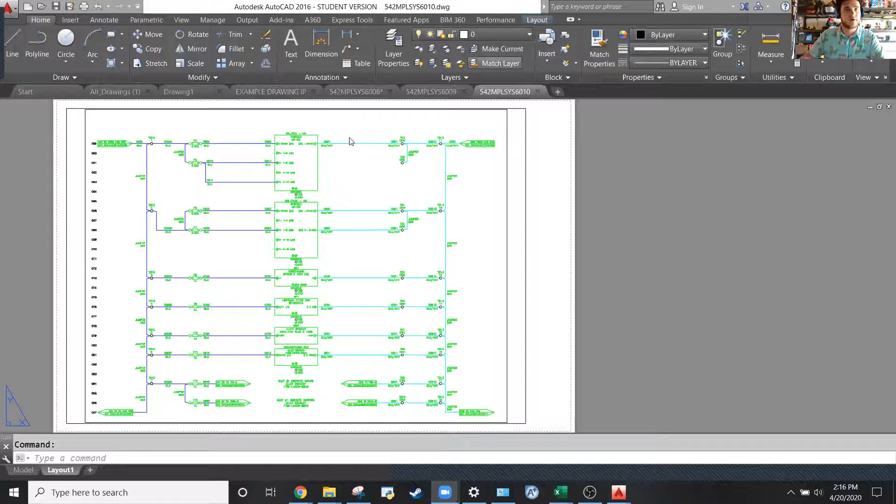So if you weren't here last time, hopefully you watched the video. Hopefully you have something along these lines where we have these 2 drawing borders. We got rid of the content that was in there already. There's a numbered index on the side. We have a little bit of content started here, and we're gonna make a 2 drawing set.

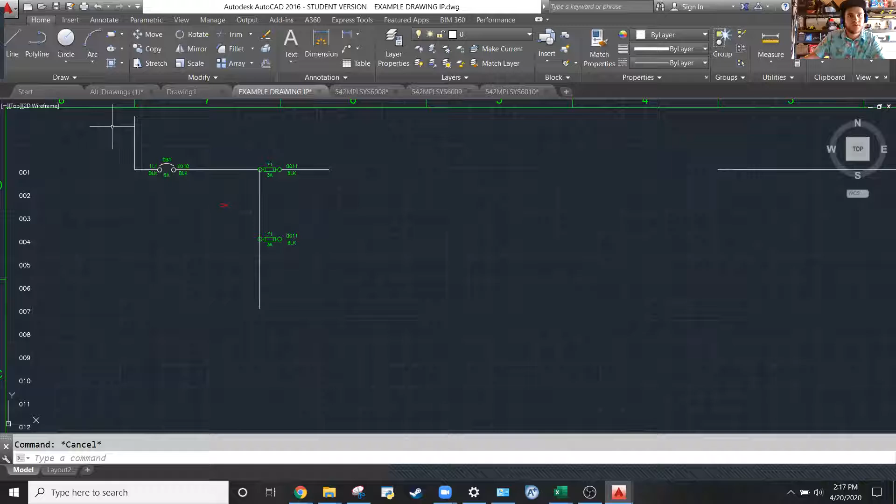Just as an example of multi-drawing sets. So real quick, does everybody have this line in, circuit breaker, and 2 fuses with a reference line and this little doohickey here? No? Can we go over that a little bit? Yeah, for sure. So all I've really done here is taken content from these example drawings here. So that was drawing 8, 9, and 10 out of the example set that I sent you guys.

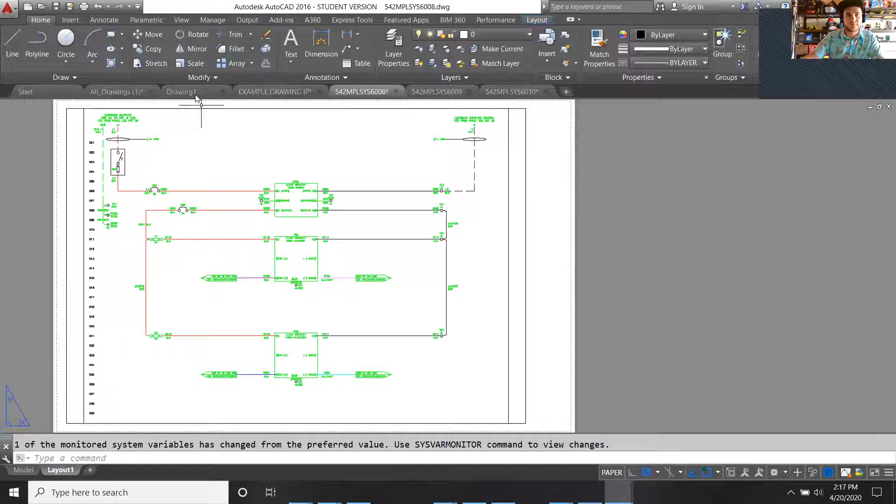So does everybody have that drawing set open and available? Because we're going to be grabbing more content out of there as we go through. Yes. As usual, yeah, thank you, Sal. I'm going to take the resounding, deafening silence as confirmation that you do indeed have the example drawings open.

So what we did last time, let's go ahead and rehash that, get our AutoCAD muscles working. So we're going to go to drawing 8, and in the model space, we're going to grab this content. Oh, I just realized I kind of made a mistake last time. So grab all the content off drawing 8 and just do a Control-C and then a Control-V, okay? And then do a quick scale to resize this content to this border.

Because last time I copied content from this drawing into our working drawing without rescaling it, which means all the text and everything is too small. So you're going to grab this, move. I'm going to go through this really fast because this is stuff we've done before. So I'm going to type move, grab the corner of this, snap it to the corner of that, select all of this content and type scale. Specify my base point for scale, type R for reference, grab this corner and this corner, and then snap it to this corner right here to set my reference scale. Cool, now that's all rescaled.

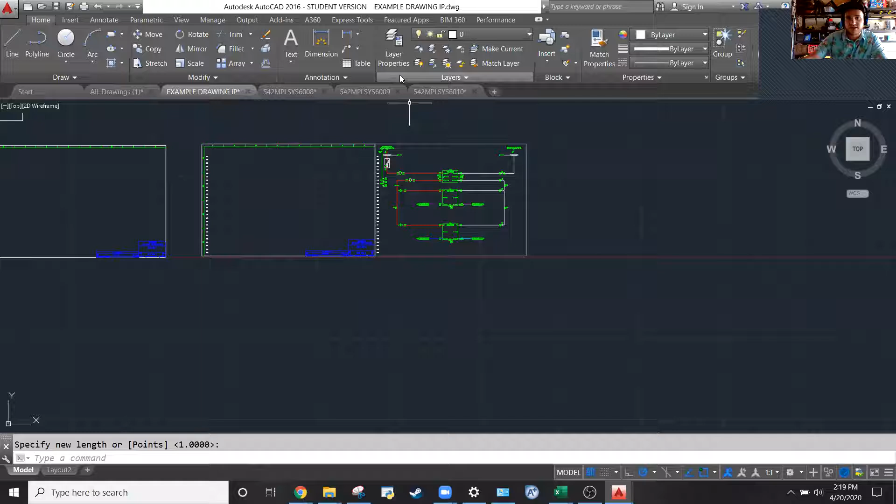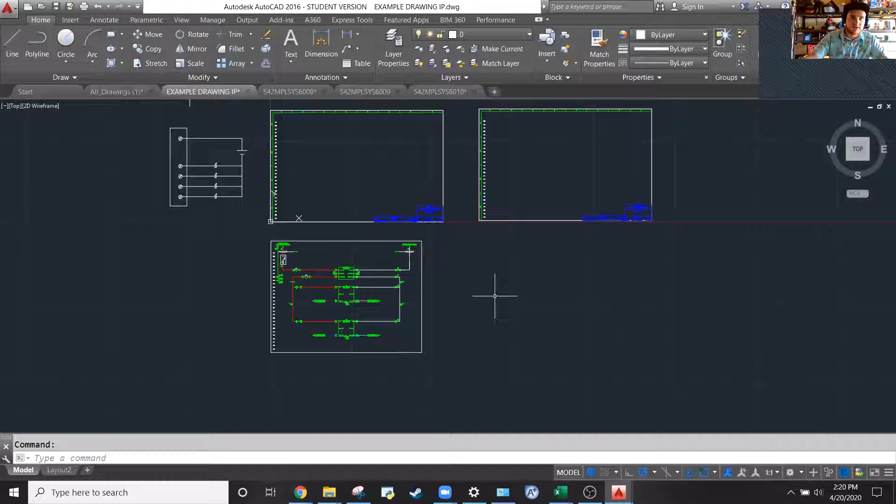Now, if you're wondering why we're just cannibalizing content out of an existing drawing rather than drawing all this from scratch, well, the answer is you're not going to draw stuff from scratch very often. There's no point in reinventing the wheel when 90% of the time the CAD content you're going to be creating, you're going to be following some conventions, and there's going to be existing content from a similar project that you can reference and use to your little heart's desire.

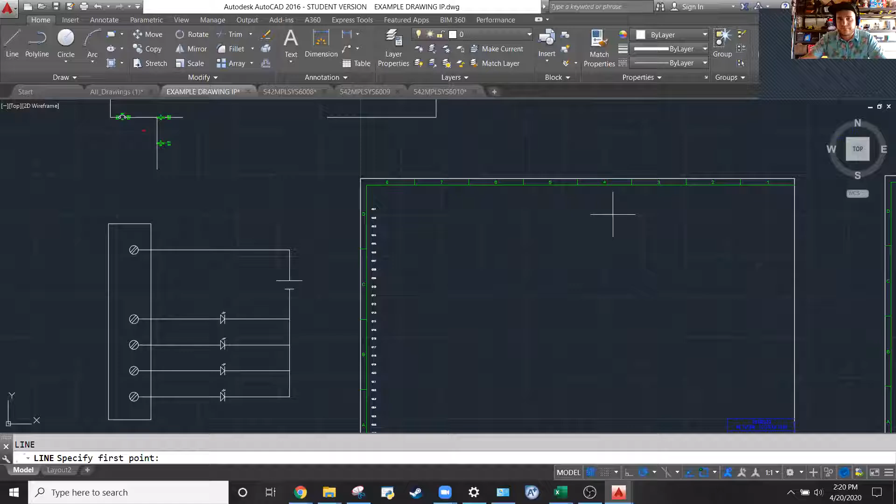Okay, so I want something that looks like this for my power distribution. I'm going to do one important thing first. I'm going to draw a reference line in my border before I insert content into my border. So I'm going to find the midpoint on my line, which is right here, and just draw a reference line there. And then I'm going to change the layer for that to the stuff layer. That's a John Davis naming convention. I tend to name stuff stuff.

And then I'm going to open the layer properties panel up here. And I'm going to change the stuff layer to be colored yellow. And I'm going to rename the stuff layer to reference. Okay. And that's going to be my reference layer that I've talked about before, that at the end of this I'm just going to hide because I don't want it anymore.

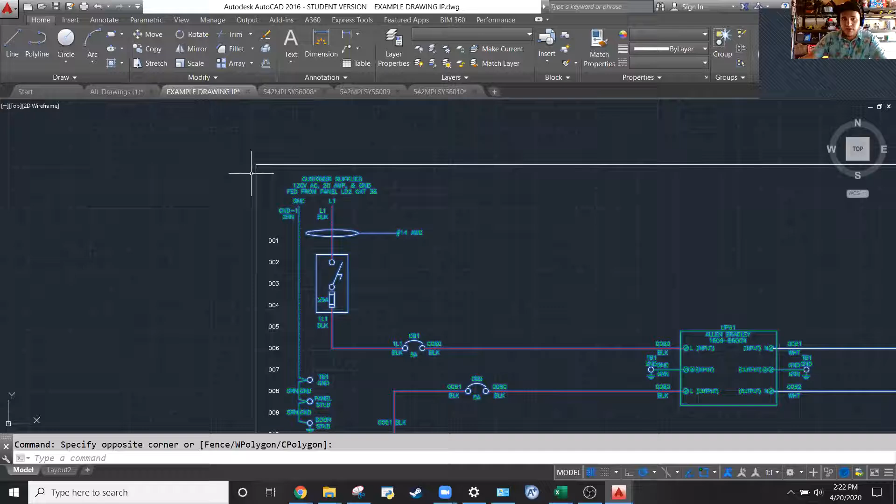So now we're going to draw a power distribution drawing. I know in my power distribution drawing for a panel, I'm going to want an incoming ground, an incoming live line, and an incoming neutral line. And so I'm just going to grab all this existing content here. Make sure you grab all that text. Okay. And I'm going to type copy. And then for my copy reference point, I'm just going to grab in the middle of this power supply right here.

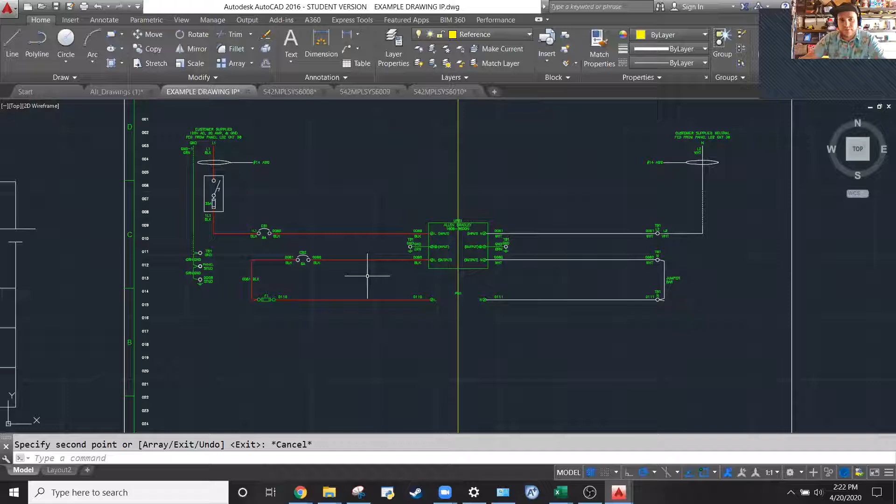Grab that line. And then I'm going to scroll up into my new drawing border and drop it in there. Okay. Now, this is scooted down too far. I don't like this, but we're going to fix that in a minute. One of the other things I don't like is this content that I'm stealing was for a heavy duty industrial panel that had a lot of juice coming into it. And so it had this big mechanical disconnect. In our panel, like we talked about last week, I don't have a big mechanical disconnect. I just have a circuit breaker.

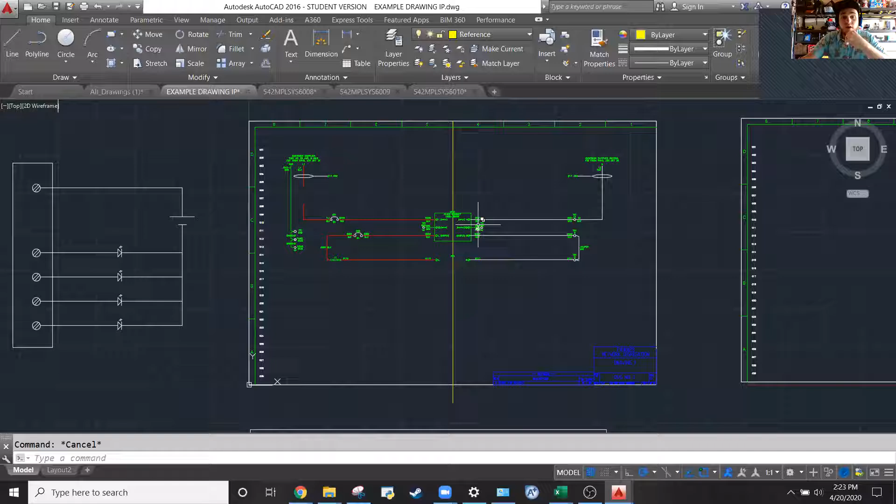So I'm going to select that breaker, and I'm going to delete it because I don't need it. Okay. Could you zoom out really quick so I can see how much of that drawing you pulled? Yeah. So what I wanted to pull is the ground circuit, and then definitely everything feeding into the first box. So it's this first UPS box here. Okay, but not this. So we'll probably go back and grab this content down here later. Okay. And so actually what we can do is just go in, well, just leave it for now.

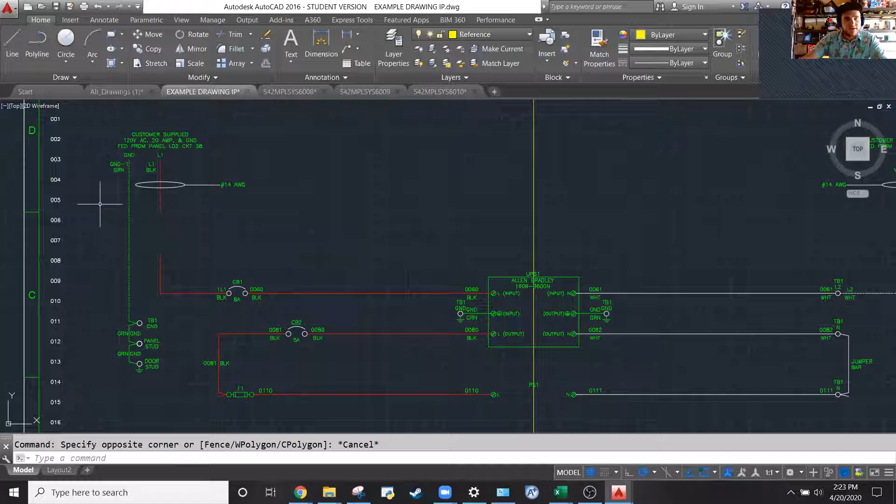So the next thing I want to highlight is that this line here is dashed and this line here is solid. Can anybody tell me why that might be? Take a wild guess. There's no wrong answers here. Nobody? We have no volunteers as tribute.

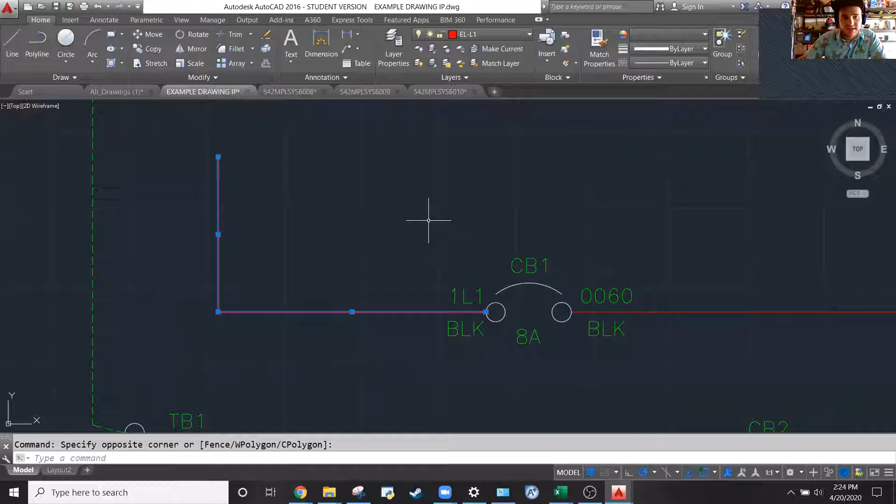Okay, so the reason this line is dashed and this line is solid is because these dashed lines are coming in externally from an external panel. Doesn't necessarily need to be power. And these lines here that were coming off that mechanical disconnect are installed in the panel. So they're present. And so basically what this is delineating on our drawing set is what wires get shipped in the panel to the installation site and what wires need to be brought into that panel once it's installed at the installation site.

Sorry. Got to shut off my air compressor this morning. Okay. So we got a chat. Yes. That sounded like a gnarly guitar riff. I thought you were gonna start shredding it, dude. Start shredding it in our Pantera style. No.

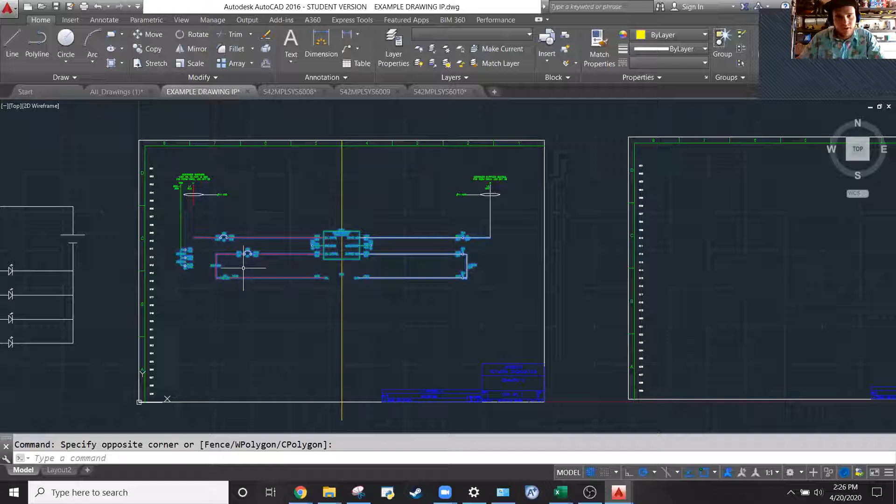Okay, so I want to delete this upright line because, like I said, I'm getting rid of that main disconnect. Actually, wait a minute. I'm going to do this right and smartly. So because I got rid of that main disconnect, I have all this unused space here in this drawing. I got a big chunk of space that I'm not using that I want to take up because there's no reason to use up all that space unless I need it. So I want to go in here and select all this content because this is all the content that we're going to shift up. And then I actually want to select, let me think about how to do this. Okay. I'm going to draw another reference line from the top of this line, come across through here, and just drop it anywhere past that line. And you'll see why I did that in just a second.

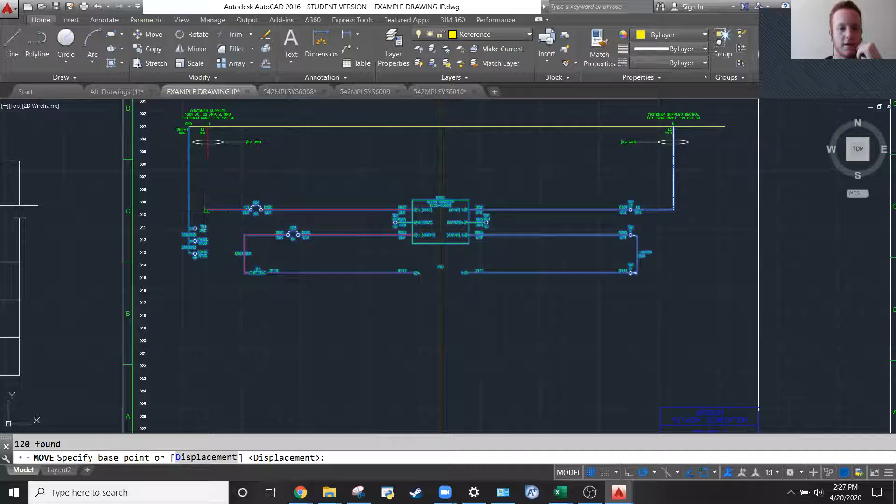Okay. So I want to grab all the content here, all these lines I brought in, as well as these two upright lines. And I'm going to type move. And then I'm going to click this reference point and bring this line up here. And now you can see, hopefully, why I drew this reference line. So now I'm going to select this line and type trim, and I'm going to get rid of all that extra length there. And so I just scooted up all that content without having to do a whole lot of adjustment.

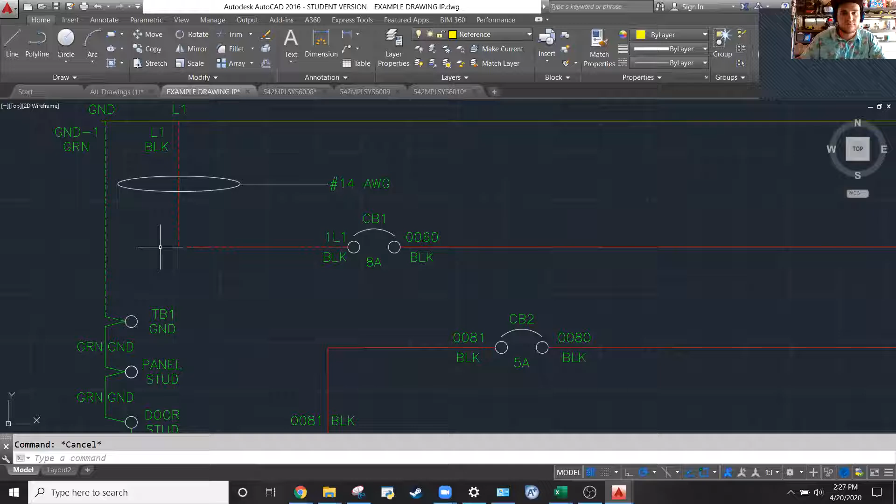And the last thing I need to do is change this line here to that dashed or hidden and extend that line over there. Over here. Oh, that's good. So I think when I had to readjust this red line to bring it out over here, that was actually a misalignment for the original drawing content. So just always be on the lookout for that. Okay. Now this looks pretty good, but it's still scooted down too far.

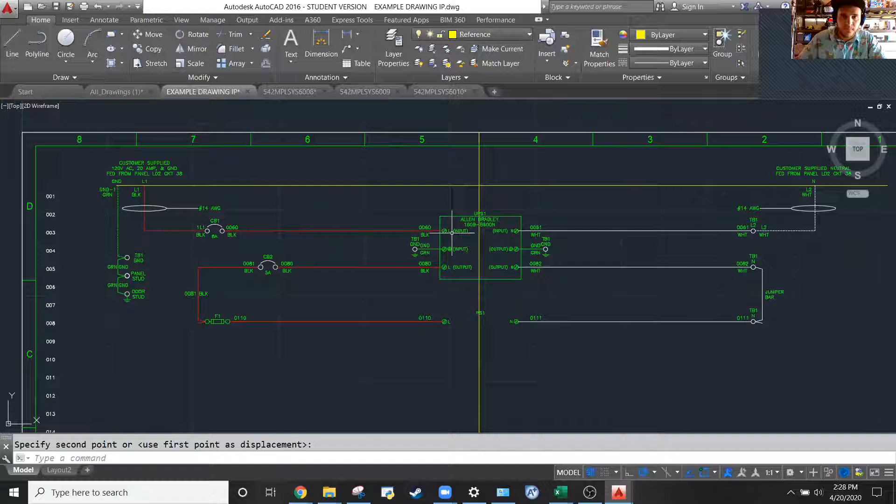If you look at the source drawing, this lettering is up against the top of the border. And so I just want to grab all that content, do another move, and just bring it up by hand to right about there. And so I picked where to align this, just eyeballing it, so that it lines up with one of these numbered indexes over here. And if you want to check that, you can extend it out.

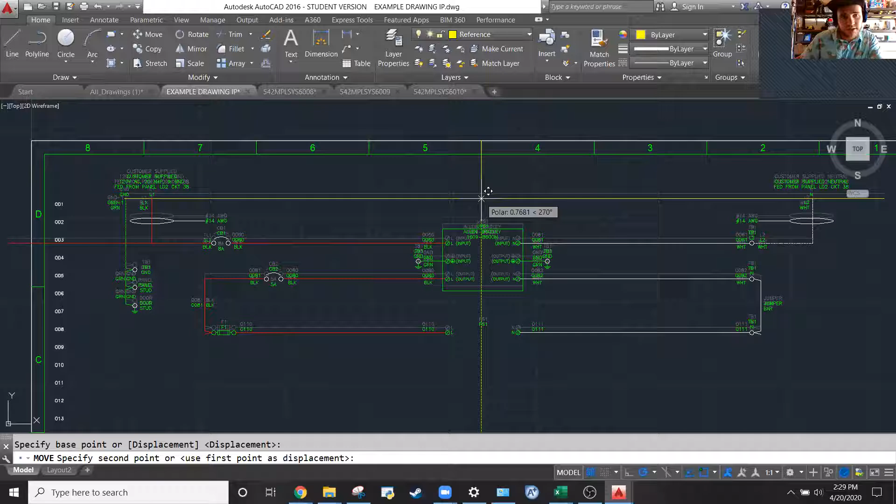Okay. So actually what I should have done, and I'm going to do it right now, is make sure that really aligns properly with one of those numbered index points. So I'm just going to scooch it down just a little bit until you can see that line is just below the 003. Okay, and I'm going to snap it. Okay, so now that's aligned. I'm going to unextend that line back to where it's supposed to be.

Alrighty. And then now I need to look at all my wire numbering. So I have L1 in, and then that's magically turning into 1L1. Well, that's a problem because that doesn't make any sense. You need your wires to be labeled the same on both ends. Okay, the reason that is because on the original drawing, you had L1 coming in, and then it went to a breaker, and then on the other side of that breaker, it was 1L1. So I need to change that to just be L1 so that we're self-consistent with our wire labeling.

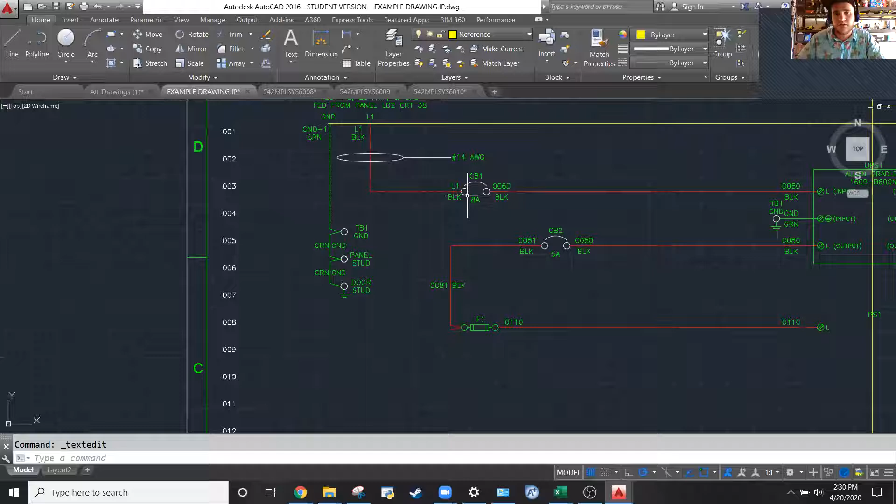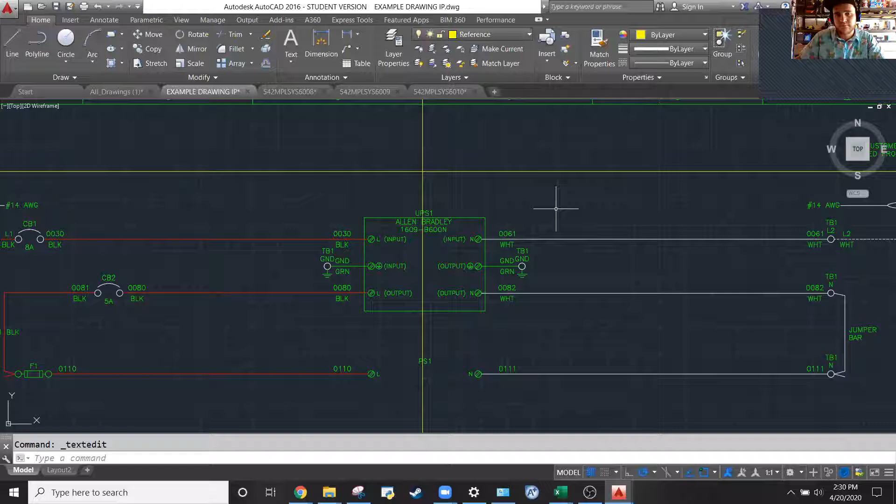Okay. And then this wire right here on the old drawing, because that content was further down, is now going to be on line 3. So I need to change this from being 0060. I'm going to change it to 0030. Okay. Do that consistently throughout. And then do the same thing on this wire. Okay, and this L2 looks good. This thickness call out looks good, so I'm gonna leave that.

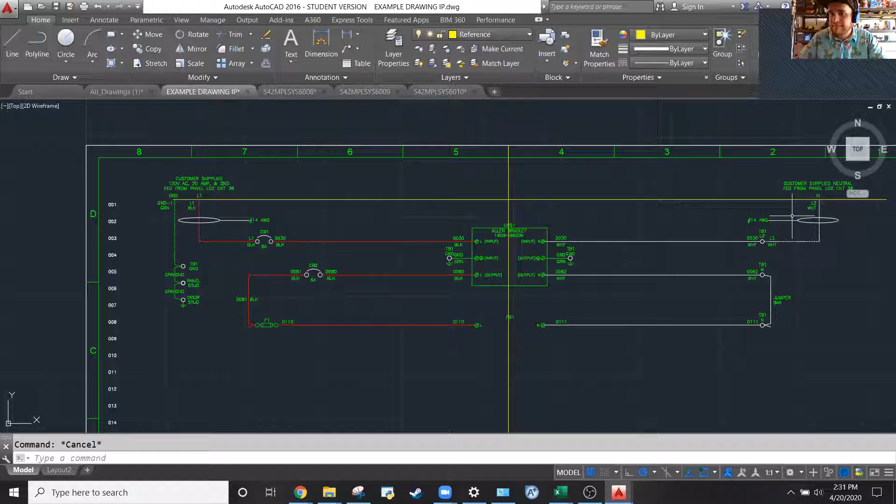Okay, now, the one other thing is these call outs of where the power is supplied. I need to change that. So double click on that. Oops. Because I don't know where that power is gonna be coming from, I'm just gonna change that to X's. So it's obvious temporarily, like you're gonna need to go in and fix that on the drawing. This is gonna be installed in my home, which has 10 amp breakers. And I don't know what circuit that's from again. So just change those to X's, change it to 10 amp. Okay.

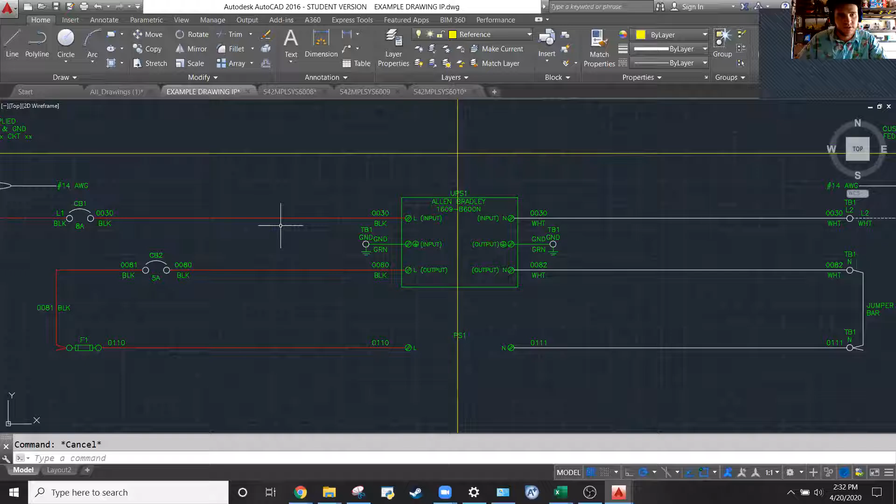Now, as Sam was asking earlier, what content do we need in here? Well, the way this is gonna be wired, it's gonna come into a circuit breaker, and then it's going to go to fuses, and those fuses are gonna be jumpered. So I wanna probably get rid of all this content here. So select that, delete it. And again, it's okay to delete some of this stuff because we can always go back to the source where it came from. We're not losing any content by making these deletions. Okay.

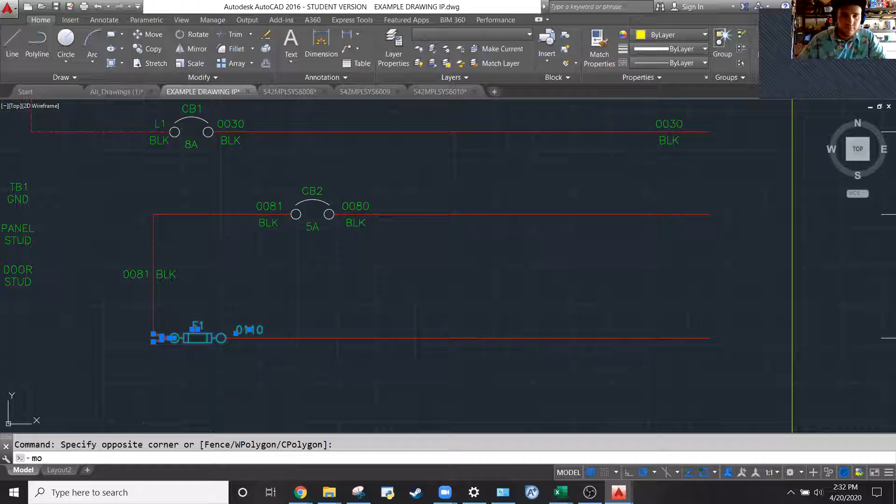So now I want to grab this fuse. I'm going to move it. That wasn't good. I don't know what I did there. Get rid of that. Okay, type move. Select my base point and move it up onto this wire here. Okay. That's too close. There's got to be a better way to do this. 1 second. Oh yeah, that's right. Okay. I'm gonna undo that. Sorry, I forgot how I planned to do this. So what I'm gonna do is grab this little line here, move that up.

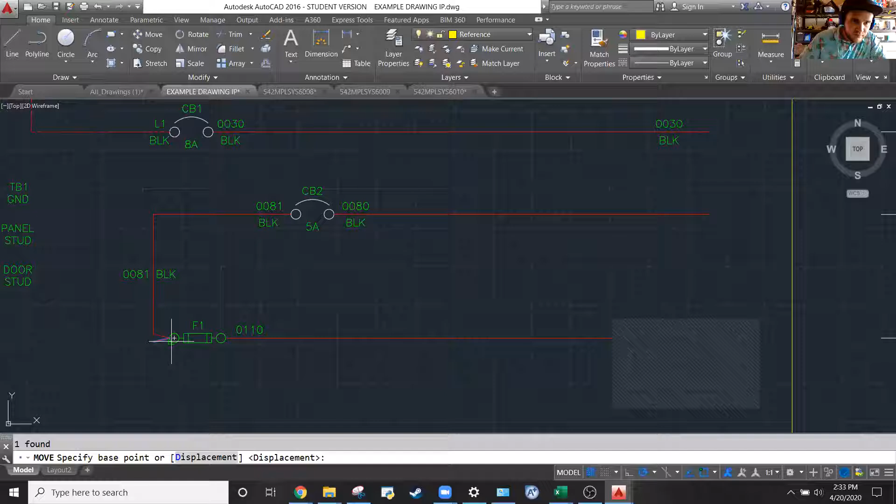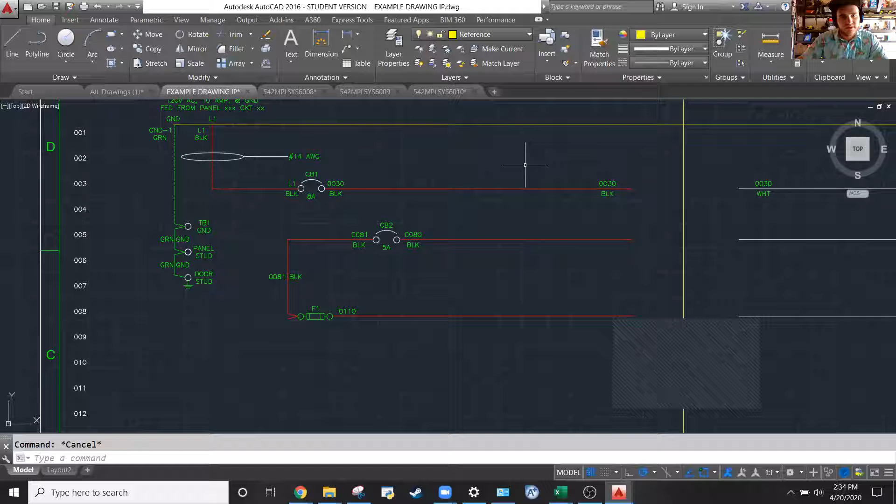Oh wait. Hang on. I'm gonna look at the physical hardware. Give me 2 seconds. I'm trying to remember how this is wired. It's been a while since I actually looked at this. Okay. So the way this is wired, it comes into the circuit breaker, and then on the back side of the circuit breaker, there's a wire that comes out and goes to fuses. And what I'm trying to do is make sure that this is all aligned so that you have room to draw in more components in the middle. So sorry for the confusion. I know how we want to draw this now. So I'm going to get rid of the lines here. I'm just going to move these out of the way for now.

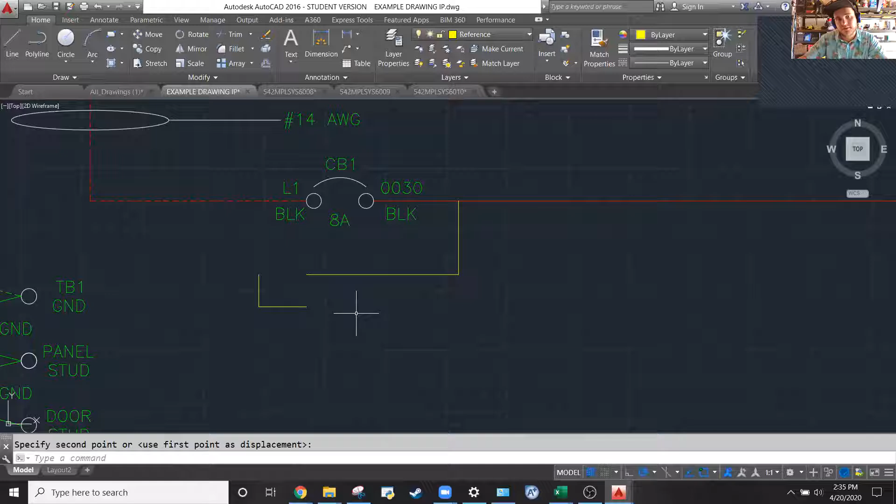Okay. And I'm going to draw another line coming down from here, down just a little bit, over, and I'm going to mouse over here and align it with this dot, the left-hand dot on the circuit breaker. Come down again. And then jog it over a little bit. And I just realized that's not exactly what I wanted to do. Okay, select these 2 wires here, type move. Click on this part here, move it over, and snap it onto what used to be that corner. And then grab this wire and extend it out. Okay, now that's pretty much what I wanted it to look like.

And now I can go down here and select this fuse and the wire label. And make sure you grab these two little weird angled lines as well. Type move. Click on this junction point between those two little weird lines and the circle on the fuse. And then go snap that onto that wire right there. Okay. That looks basically like what I wanted. Okay. Now,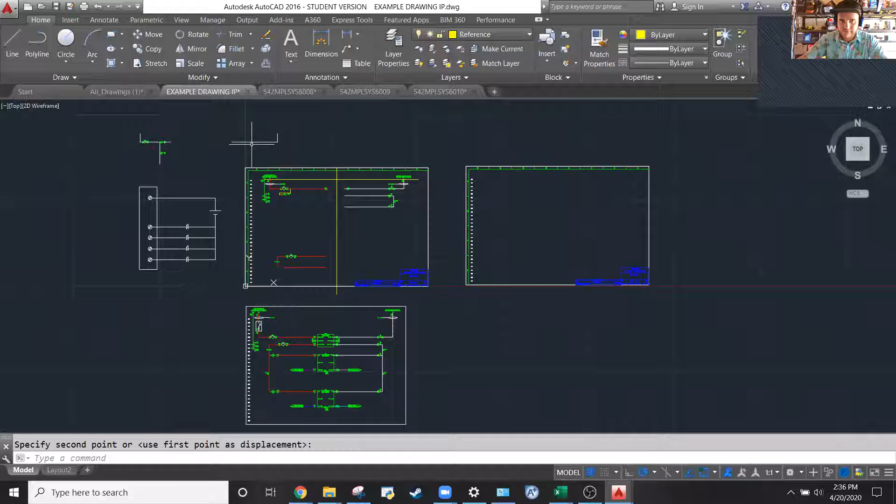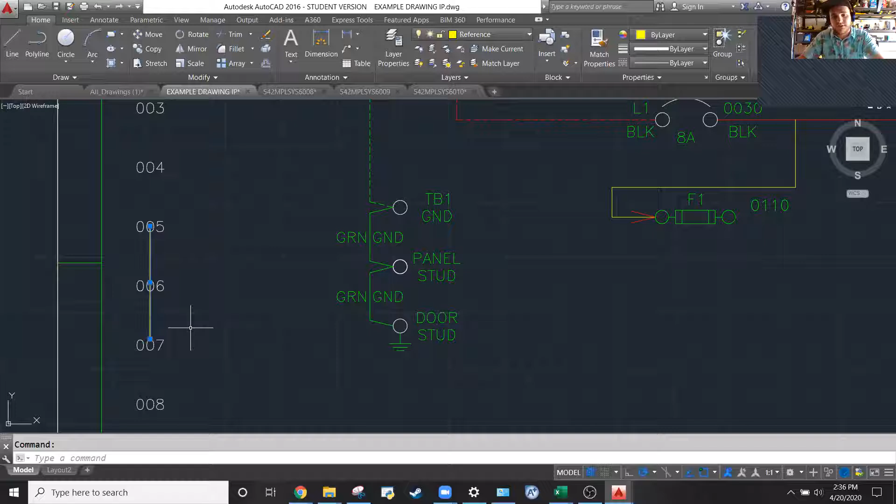Okay. Now, come over here and draw a line from the center of this 0 in front of the 5. Oh, just clicked too soon. Draw a line from the center of the 0 on the 5 down to the center of the 0 on the 7. Okay. And this is a reference line that we're going to use to set our spacing for all the rest of the fuses. Okay, so drag that over, grab that line, type move, stick that onto that little point right there.

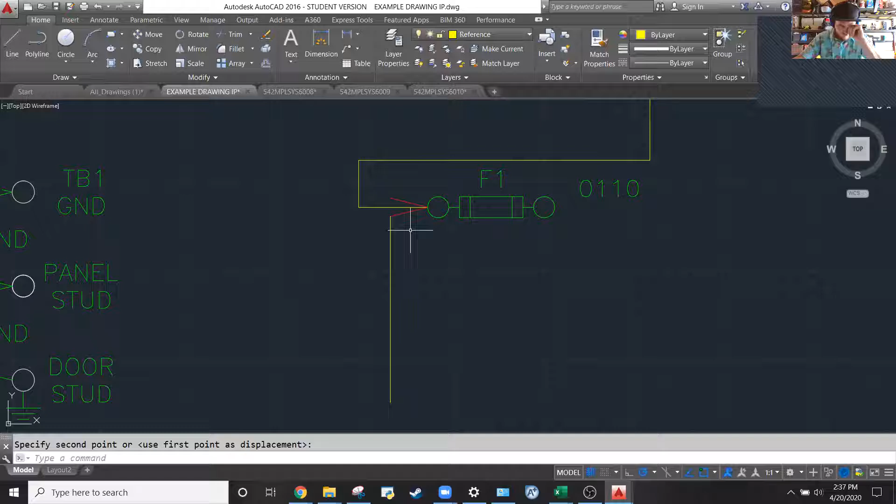Sorry, that's the wrong spot. Type move again, and snap that onto the center of the circle on the fuse right here. Okay, so now we're ready to start copying fuses.

And I happen to know that in my panel, select the fuse, select this reference line, and also select these two funny looking little red lines here, and type copy, okay? Gosh dang, I can't get all the content I need. Okay, select all that stuff and type copy. And then you're gonna copy that fuse

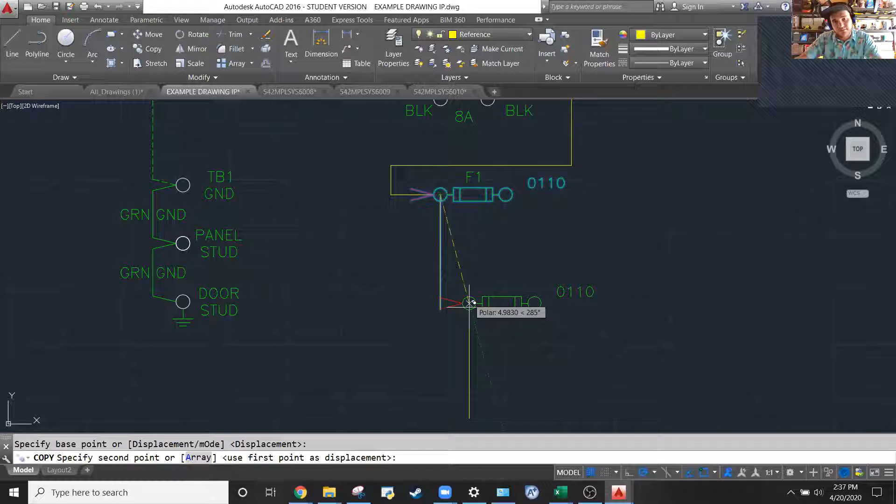4 times for a total of 5 fuses. So 1, 2, 3, 4. So that gets us 5 fuses total. Ah, shoot, I didn't get the fuse. Okay, so I'm gonna copy that fuse, or that fuse label.

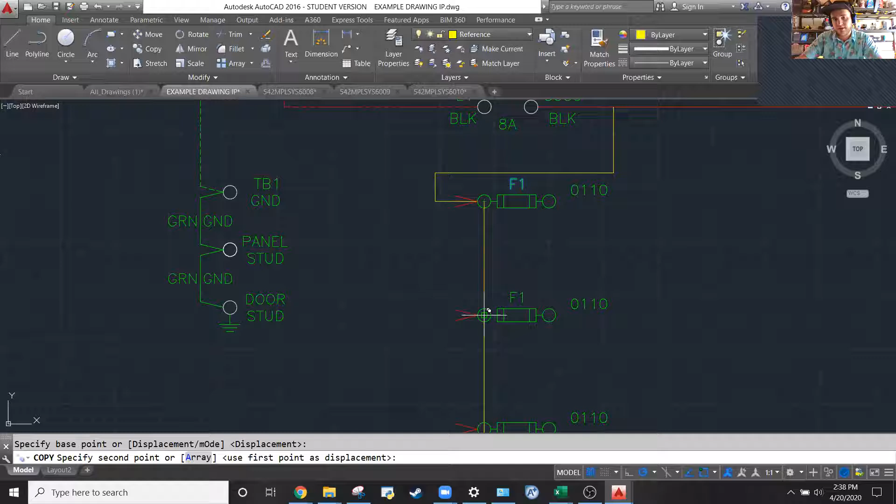And again, so I just grabbed that text and typed copy. So now I'm specifying the base point. I'm going to specify the center of that circle. And then now I can copy it onto the exact same spot in all the fuses by hitting that same spot on all the circles.

Okay. Now all these fuses are jumpered together with jumper wires. And so that's why we have these funky little looking lines right here, these 2 diagonals. So what we need to do is close the gap on those. So I can just use a line to go end to end. And then rather than individually going line and then clicking escape and then hitting line again, I'm just going to draw one of these lines and then I'm going to copy it, because that's actually going to be faster than manually drawing each line. Okay, so same deal, copy, jump those together, jump, jump, bam, done.

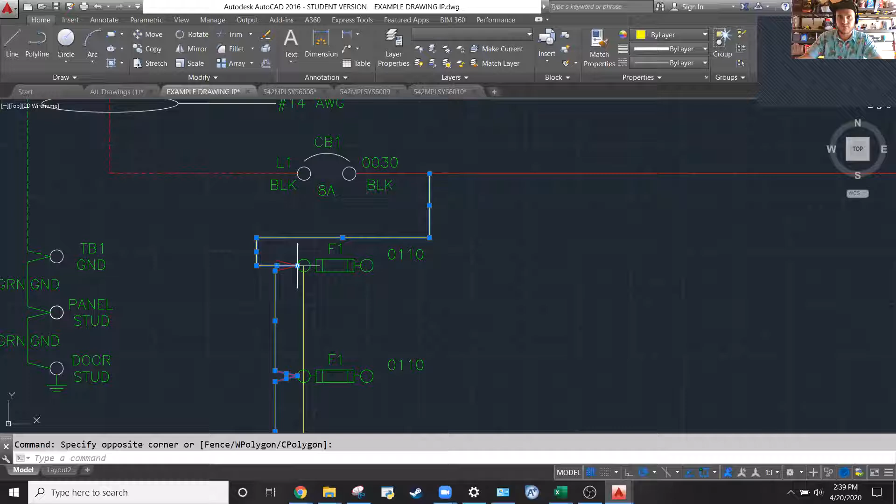Okay. Is this supposed to be on the reference layer? It's not. So that's something that I just realized I've been doing, and we need to change. So select all those jumper wires, and then also select this wire here that I drew before. Make sure and get all segments of this wire, and change it to the L1 layer.

Okay. Bam. So you see now, we just changed the layer that's on. This looks kind of shoddy the way I drew this.

To be honest, I should have spaced it out differently, but that's okay. We're just gonna roll with it because this is an example drawing. If you're doing an actual drawing, you definitely want to make this look a little bit prettier, but this is just for demonstration only, so we're gonna roll with it.

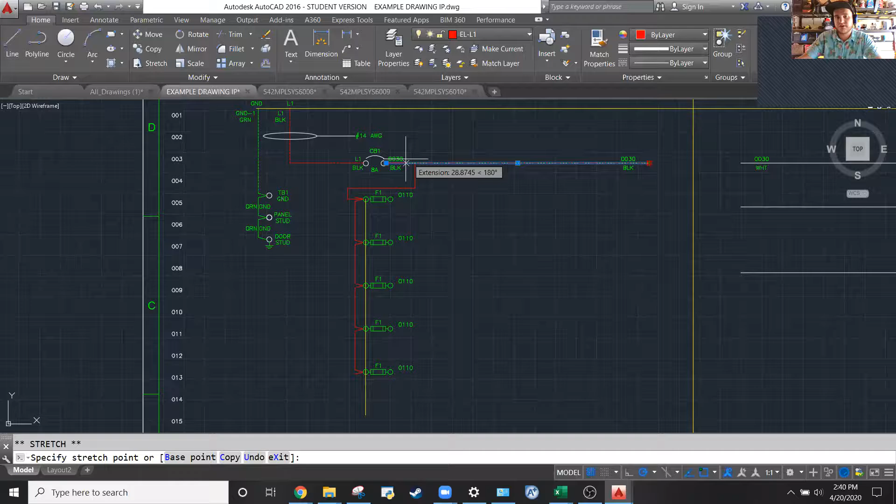So you saw there was this wire here, this is sticking out too far. So I'm gonna trim that off. Get rid of that labeling, and then get rid of this little diagonal doohickey there. And then that looks pretty good. That's pretty much where I want it to be.

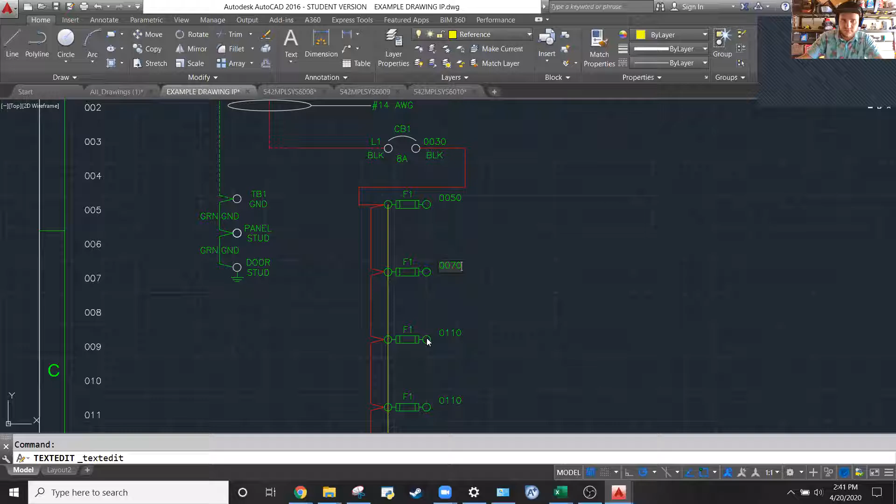So now I just need to go and fix my numbering. So I know this is on 0050. This one is 70. And so on and so forth. And even though I don't have actual wires shown here, I know they're gonna be there, okay?

Now, those reference lines are kind of funky, so I just wanna show you real quick how we can get rid of them. You go up here, you click the down arrow on the reference, and you turn that light bulb off. And you say, yes, turn off the current layer, because that's what I want to do. And those reference lines go away. Cool.

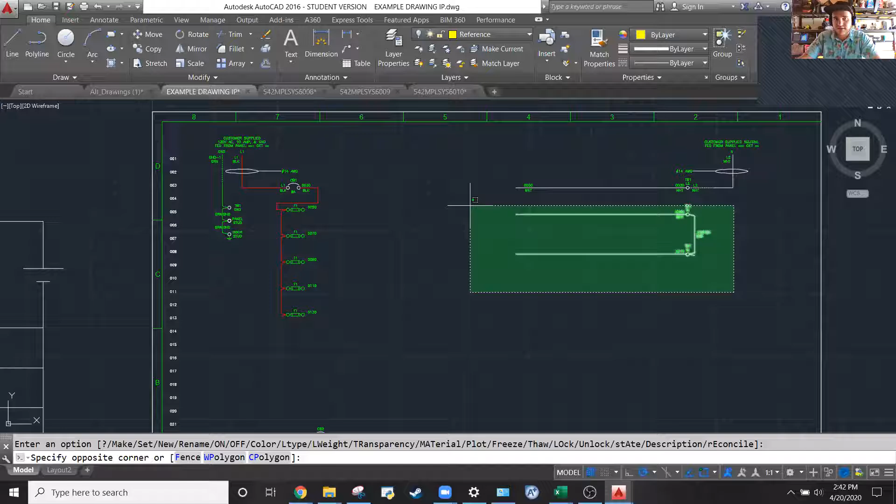So now, real quick, I got to resize the other side of my drawing. And I'm going to do that by taking this content. Spoke too soon. I'm going to delete these two lines that are sticking out for now.

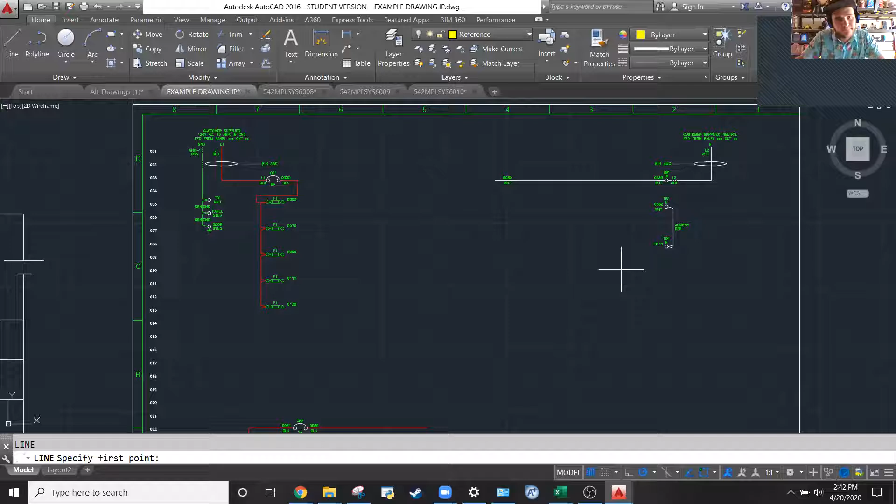And then I'm going to draw a line temporarily from this end of the fuse out here. Oop, sorry. I got to turn my reference layer back on. Okay, so now I got my reference line. I can move this content up to be on that reference line.

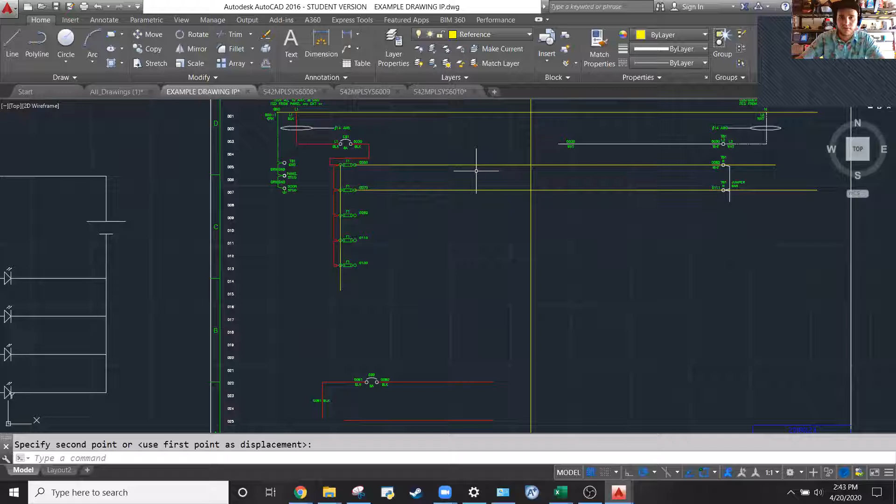Alrighty. And then I'm going to draw another reference line from the second fuse. So I know where this bottom content needs to line up. And the reason I'm having to do this is because on the drawing that I borrowed this from, these lines were spaced every 3 index lines, not every 2. And just for the sake of condensing my content, I'm making the spacing to be every 2. That's kind of just a stylistic choice.

Okay, so I need to shorten this line up.

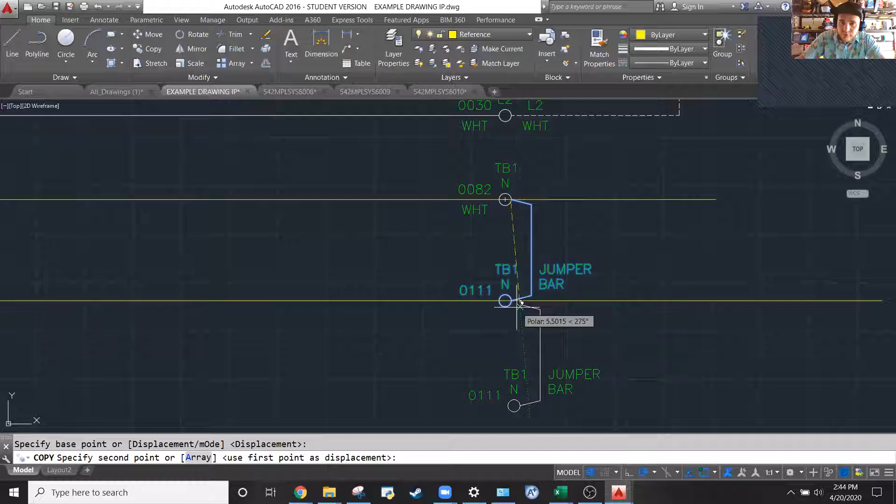And then I'm going to copy all of this content. Copy. Boom, boom, boom. 1, 2, 3, 4, 5.

Cool. And as you can see, these are labeled jumper bar because these are actual jumper terminal blocks.

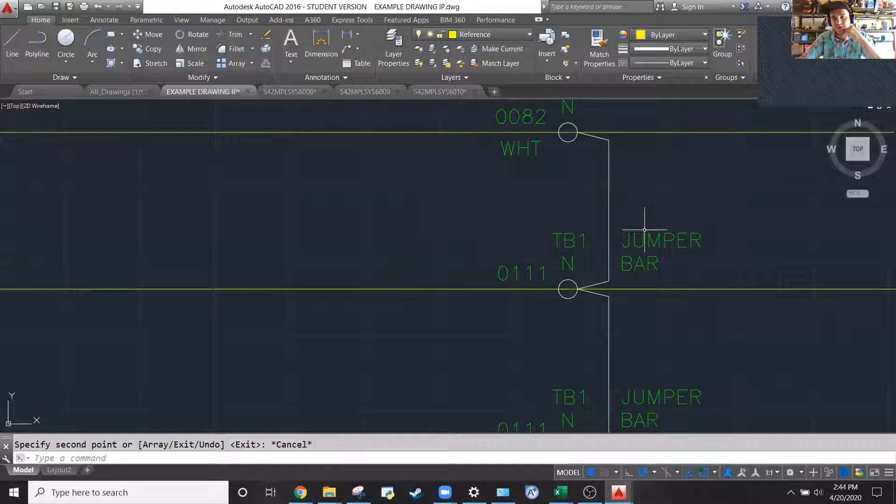Looks good. Oh, I need to show one more jumper here. I'm going to select that. Content, so the jumper bar and the label. Copy. Whoa, apparently I typed circle and not copy. So reselect that, copy, select, move, oh.

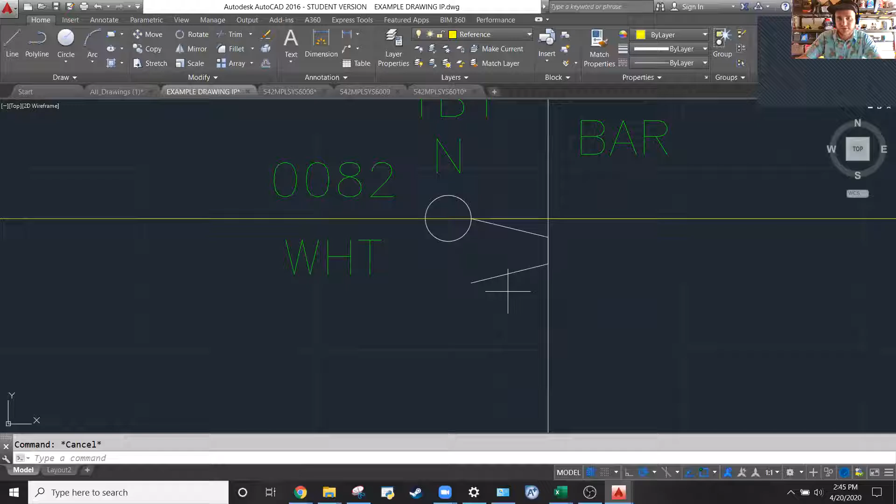Jumper bars need to be the same size as the space between the fuses? Yeah, okay. So in the real physical world, you can buy jumper bars that are specifically sized to the space between your components. So I'm just cleaning up the spacing here because it's not really precise. That's fine, and I'll show you what that physical component looks like in real life.

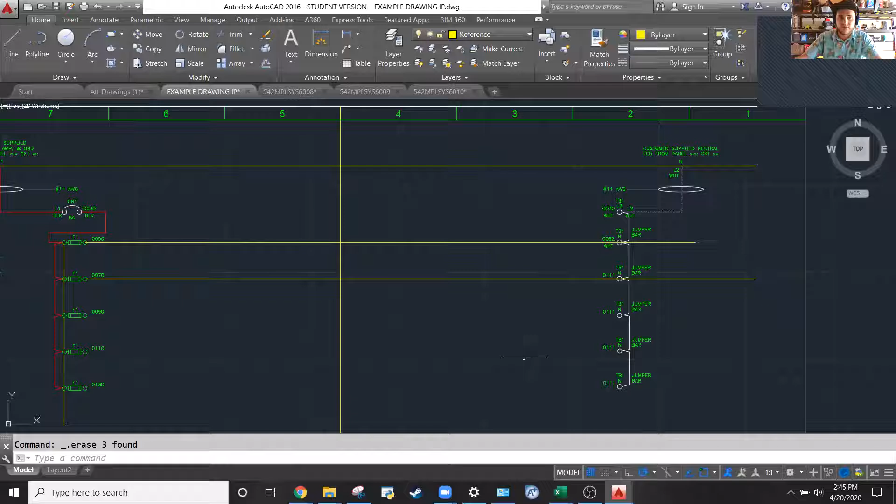Okay, now in this drawing we would really need to go in and clean up all of this labeling, renumber it, and just make sure it's accurate to what we're drawing. Same thing, we would renumber all these fuses. For the sake of expediency, I'm not going to do that right now because we're trying to burn through this, and this is, again, I'm trying to give you the tools, not show you exactly how to do every single minute point.

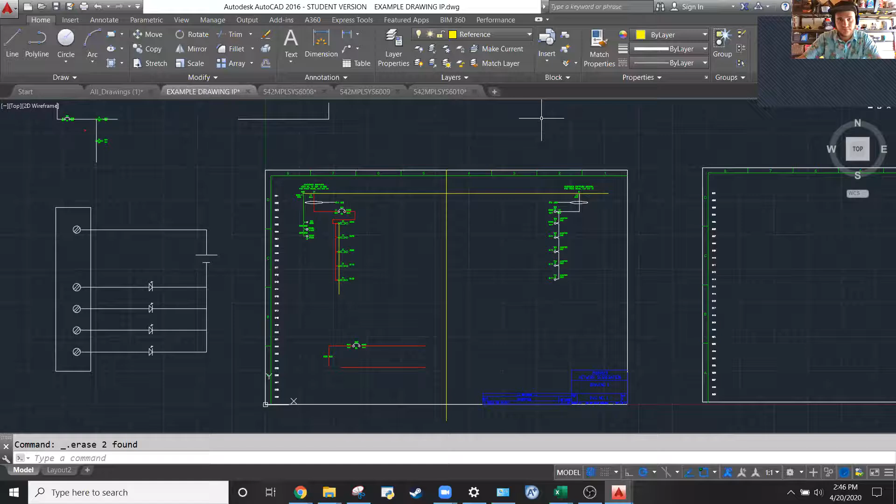So the next thing I want to do is come down to our source drawing that we're cannibalizing content from and grab these arrows. So just highlight that, and you can actually just cut and paste this content up into our working drawing.

Okay, and what I want to do is grab this arrow and type move. Come over here and drop this on this terminal point right here. And as you can see, there was already a label there, so now we got this weird thing where you got overlapping labels.

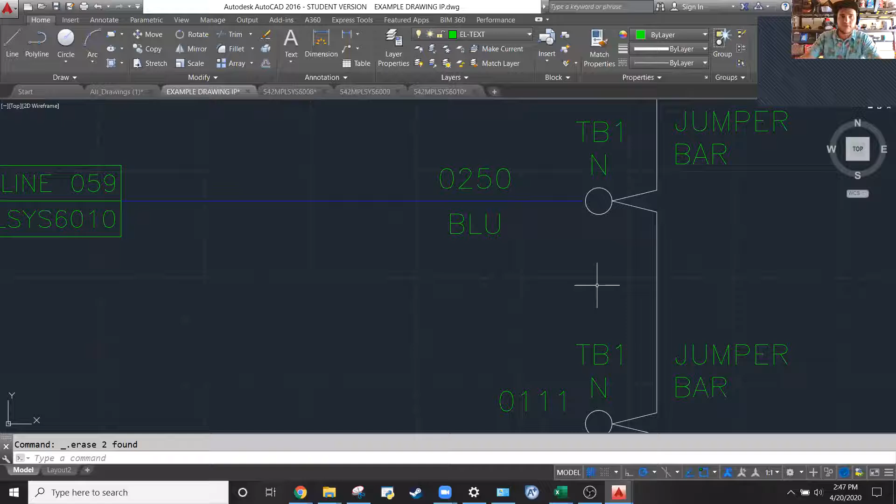Get rid of those. And I'm going to do the same thing with this arrow down here. I'm going to move, and drop that right on the fuse there. Get rid of this label.

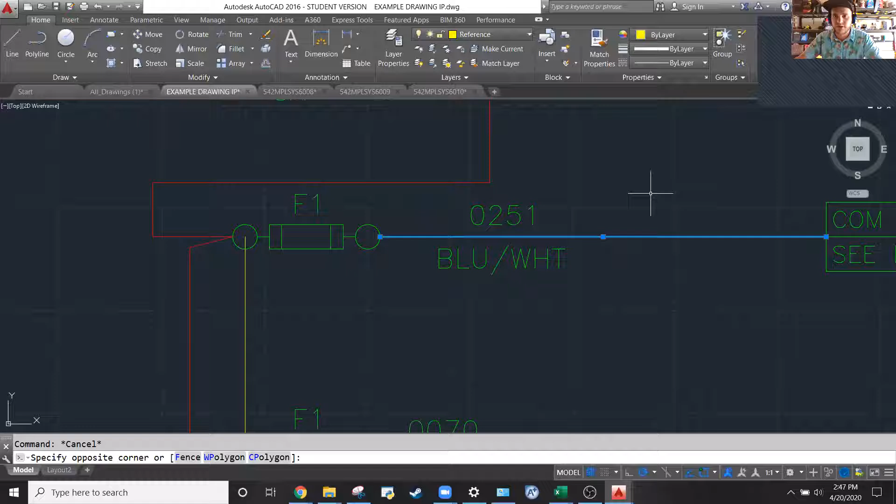And then you would need to renumber these labels and make sure that this blue, white, whatever, is actually accurate to what you're going to use to wire. So, and then this arrow needs to say, in our case, this is 120 VAC. Capitalize that VAC to line.

And we're going to go to the next drawing, so I'm going to look over at the next drawing. You know what, I'm going to make this come in on line 1 because there's nothing in here and I can do whatever I want. So I'm going to say to line, oh but wait, that isn't line 1. So this that we're drawing in is drawing 1, this is drawing 2 in the set. Drawing 1 ends at 29, which means this, when I relabel it like I'm supposed to, is going to be line 30.

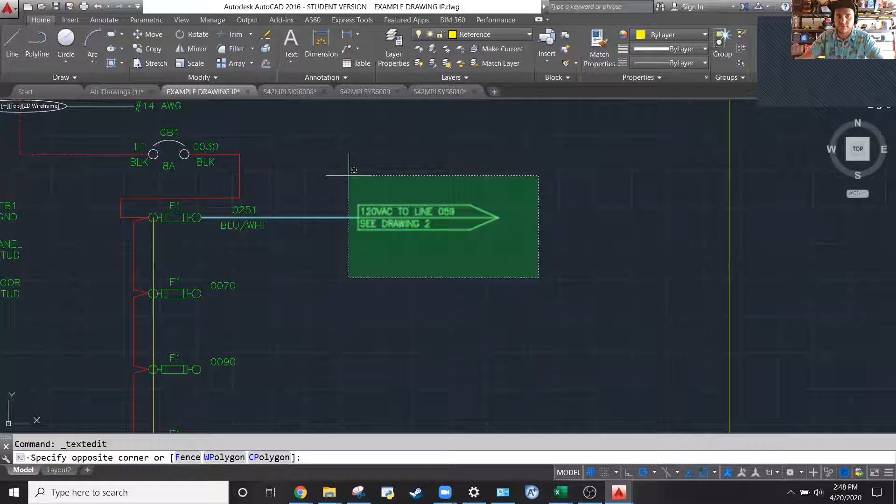So I'm going to say, I know that's going to line 30, okay? And then I need to know what drawing number that's going to. So I look over here, drawing 2, okay? In my set, I'm going to say see, drawing, wow that says drawing, see drawing 2, okay? And that's how we do reference arrows between drawings. So I need to do the same thing over here. 120 VAC to line 30. see drawing 1 or see drawing 2.

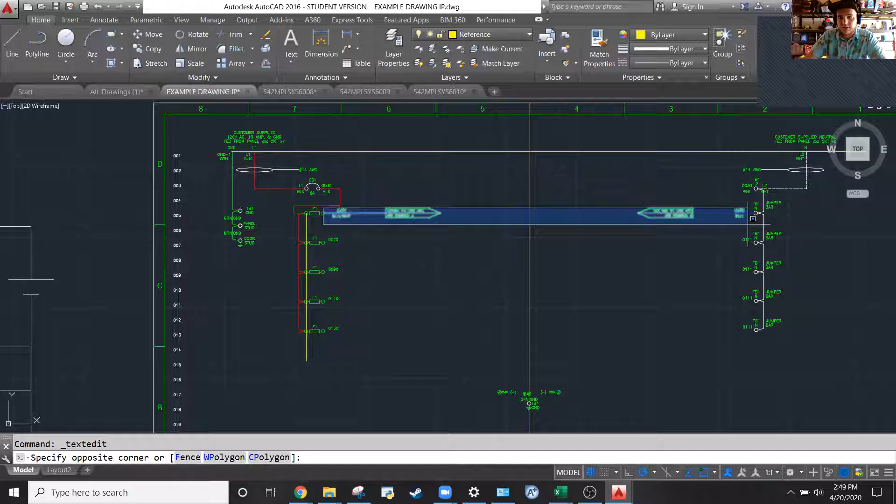Alrighty, super awesome. Okay so now I've done that. Now what I can do is select. I need a reference line. So what I'm going to do is copy these arrows over from drawing 1 onto drawing 2 to show the incoming references.

And what I'm going to do is just say line, and I'll put that right underneath the 001. I'm going to draw a reference line, okay, and that's just to help me locate where I'm going to drop the content in as I migrate it.

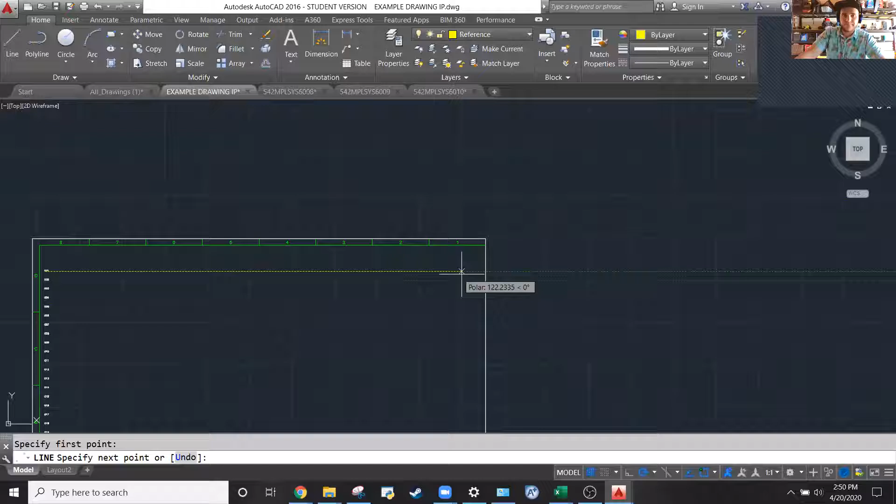Okay, so I'm going to grab this content, so this arrow and this arrow, and I'm going to copy. I'm going to come over here, so I'm just going to drop it right here for now because I'm going to move it. Okay, so now I've copied my arrows.

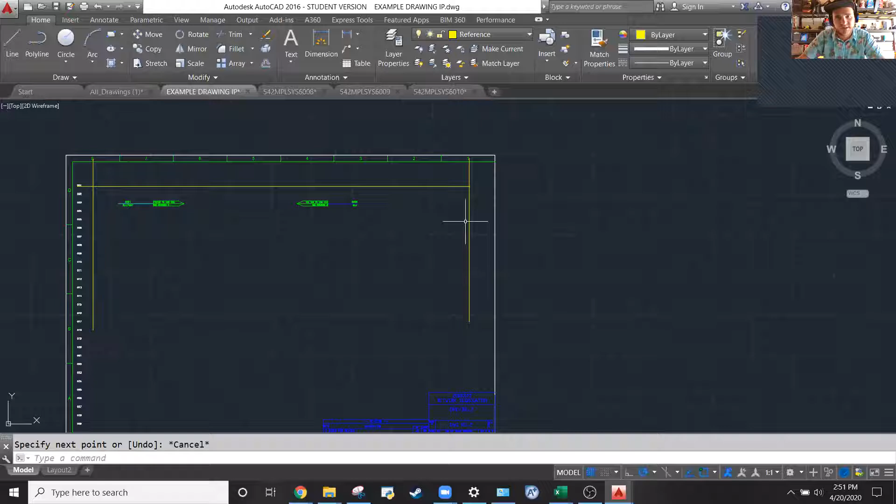I need to decide where in this drawing border I want those arrows to be located, and I'm going to locate them out towards the edges as much as I can. So I'm going to draw a couple more reference lines here. I'm just going to pick right in the middle, this 8 is going to be my incoming reference line. The reason I picked that 8 is because on the other side, I can sort of mirror this by putting it on the 1, bring that down. This is kind of an arbitrary choice I'm making, it's not that big a deal. I'm just drawing reference lines so I know where to drop my content.

Okay, now I'm going to grab this arrow. I'm going to move it.

I'm going to grab this intersection on the tail side, and I'm going to move it onto this intersection of reference lines I had here. Then I'm going to rename it.

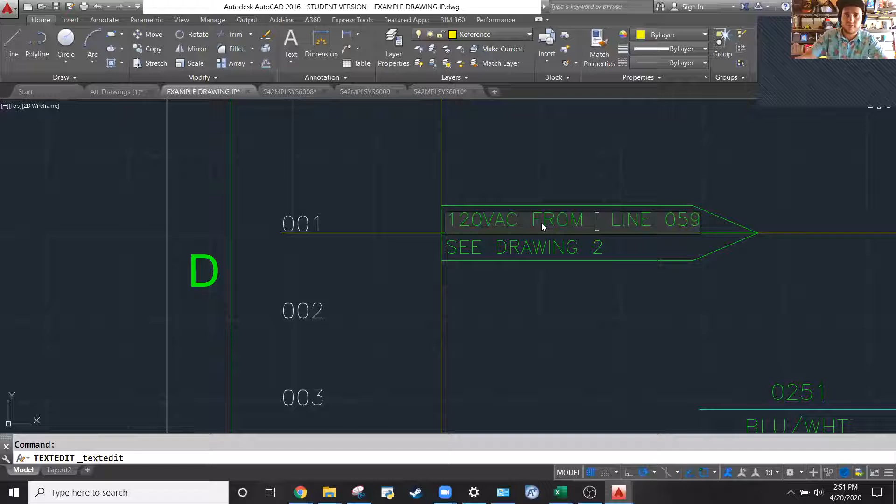120 VAC from line—well, I don't know, what line is that from? Let me go over here and look at my source drawing. Okay, that's from line 5. From line 0, 0, 5. Okay, and see drawing 1. Alright, because that's where it's coming from—it's coming from drawing 1.

Then I'm going to select this line, and I'm going to move it onto the pointy end of that arrow. Alright, and then I'm going to do the exact same thing on this side. Move, and put the butt end of that arrow on that intersection.

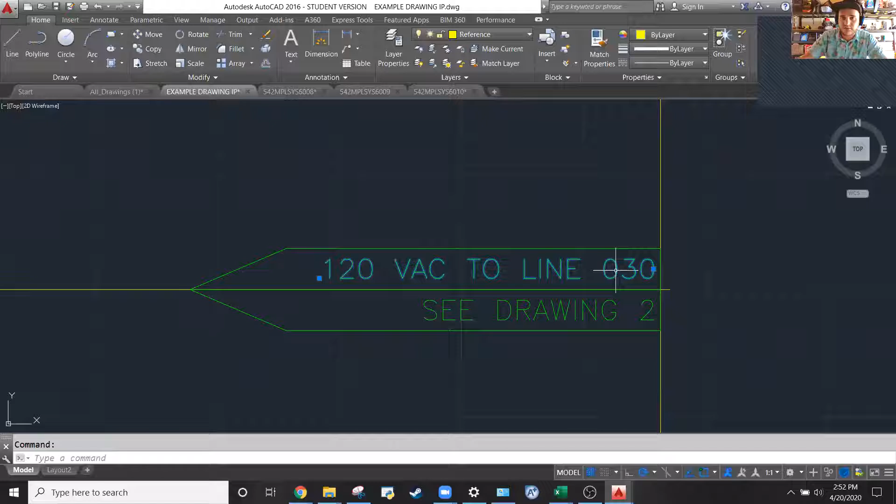From line 0, 0, 5. Cool, see drawing 1. And I'm also going to move this wire onto the front. Okay, we are almost done with this.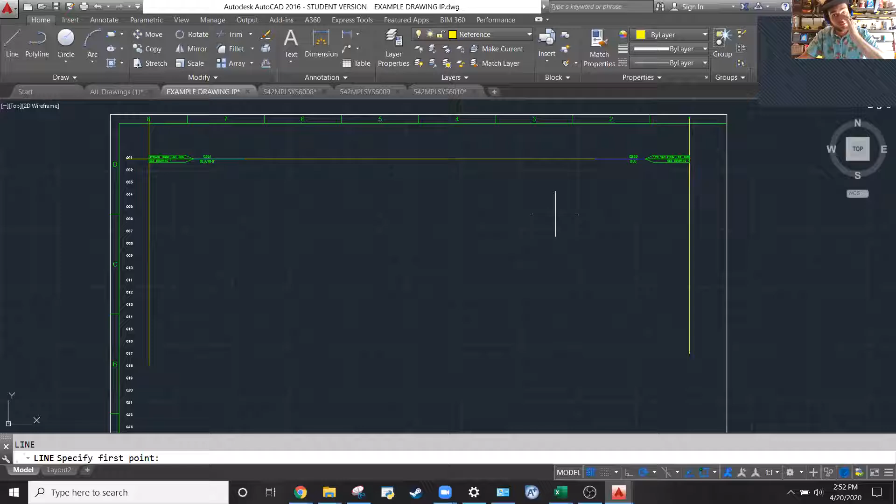The last thing I want to do is yet another reference line down the middle of this drawing. So I have my point, and then what we're going to do is put a power supply in here.

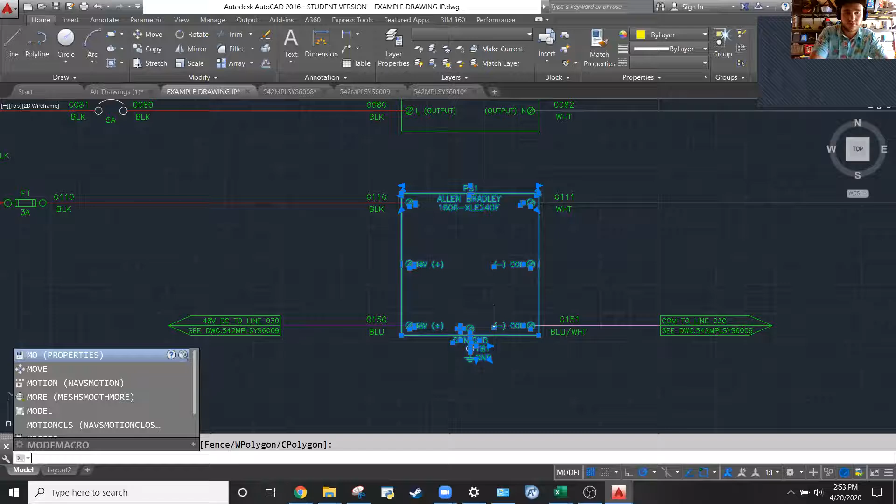So I'm going to come over and steal an example of a power supply from my original cannibal drawing. This looks like a nice power supply, so I'm going to grab it, copy it, and select a point right about here as my reference point to copy from.

I'm going to go to the drawing I'm working on and drop that reference point right on that intersection. So you see, when I copied from here, I made the rather intelligent choice, if I do say so myself, to make my reference point of copy arbitrarily right about here—centered in the middle, but not on the border, inside of the component.

And so when I copy it over here and land it on this intersection, it's lifted up a little bit in the drawing, and it's kind of nice and located where I want it. Now I just realized that was a dumb choice because I need to terminate wires into this thing.

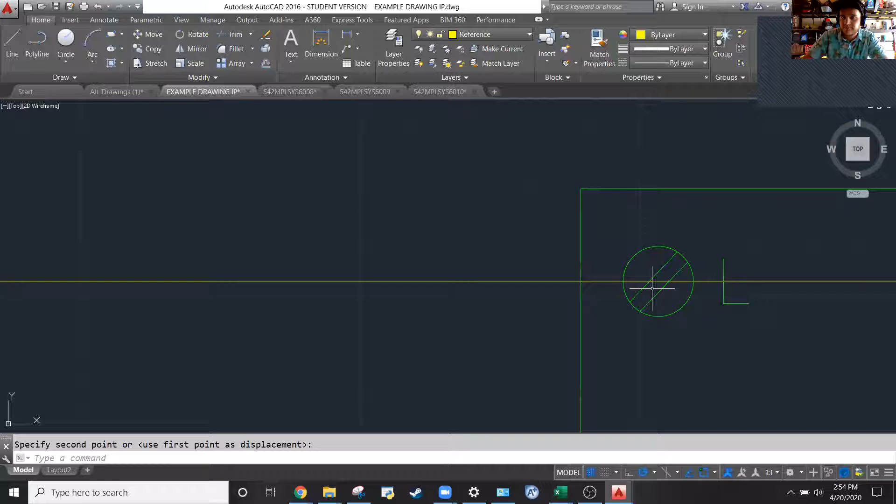So I'm going to select it again, type move, and select the edge of this and move it down onto my reference line. Okay, so now the screw terminal points on this power supply can be lined up onto our wire lines.

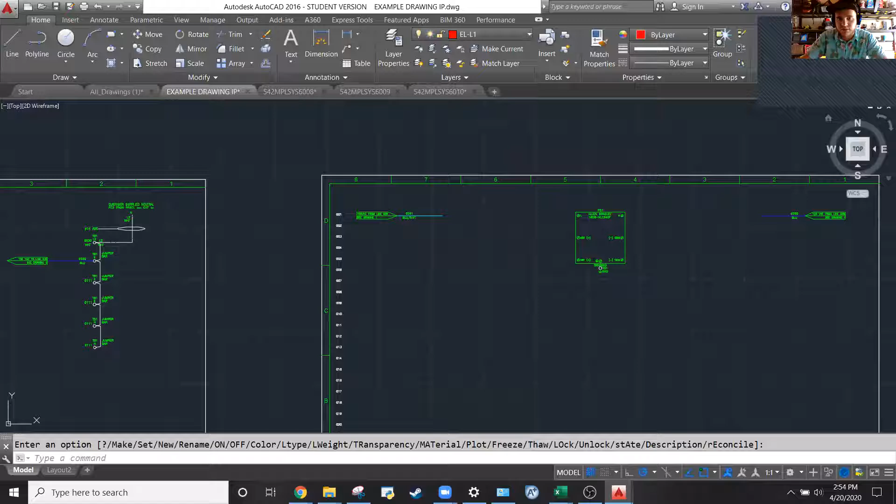And so I'm going to hide—actually, I'm going to change my layer to be the EL-L1. And then I'm going to hide the reference layer real quick because it's kind of in the way and blocking what I'm trying to do.

So now I can select these two wires and just click and drag to extend them out to the termination point right there on my power supply. Do the same thing on the neutral side. Okay, that looks good.

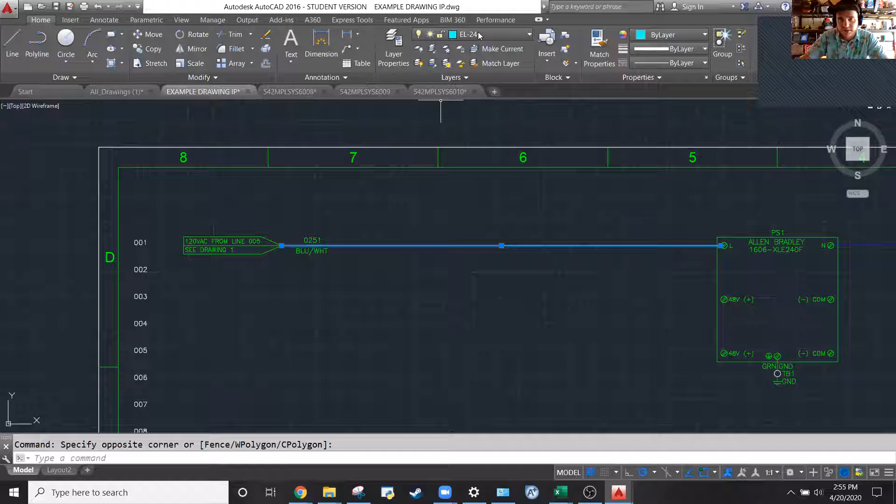And then I just remembered this right now is on the 24 volts layer, so I need to change that to be on the 120 layer. So I'm going to select this wire, select that wire, change them to the L1. And then on the neutral side, select this wire and this wire and change them to the L2.

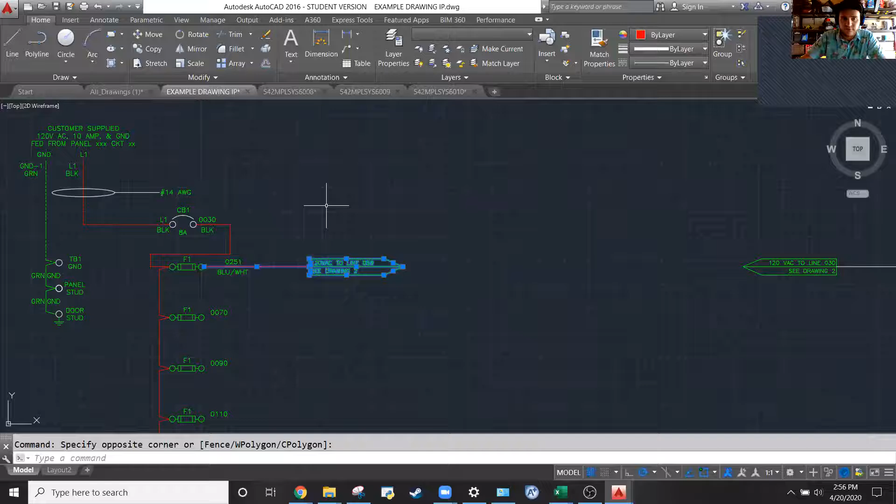Okay, and so now I'm showing I have 120 volts coming in to this power supply, which acts as a little transformer. What I could actually do here is draw out arrows from the 48 volt supply side of this, out in reference to another drawing. So really what I've done here is just shown how you can use these reference arrows to have a wire come from one drawing, for example this drawing, into another drawing.

And what you're going to do is keep the wire label continuous across those, and you're going to call out your line numbers. That should say 30, not 50.

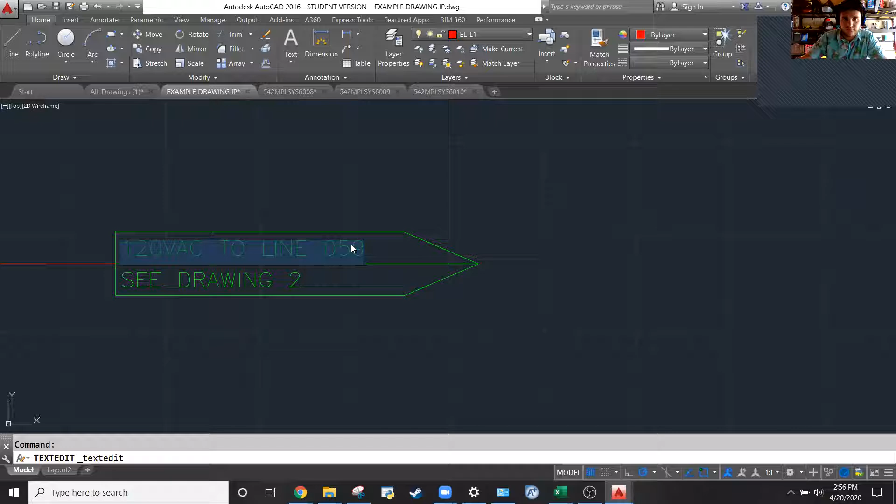And so you can use that, because at the end of the day, you're not going to be able to jam pack all of your circuit information into one single drawing. You're going to have to break your set out into multiple drawings, and you need to be able to reference connections between your drawings. So that's how you do this—you use these reference arrows. So I know that was a really kind of long demonstration to get a very little bit of content.

But one of the points of feedback I got last quarter is that I was kind of going too fast and it was really hard to follow. And so I'm trying to show more minute detail of what we're actually doing in these drawings so that you can kind of follow along. Now,

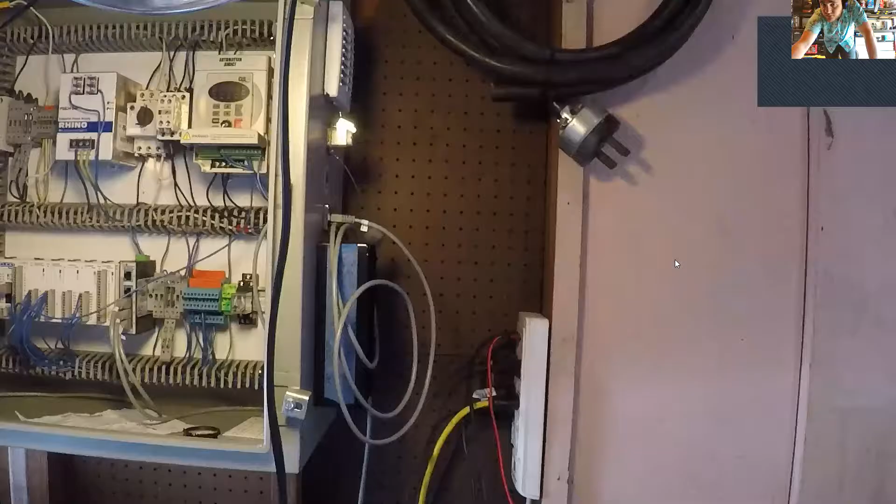ultimately where we're going with this is we need to actually finish the drawing set for our panel. And so in the last few minutes that we have, I want to actually show you our panel and what we're going to be drawing. So that was just a quick little example of power distribution drawing. But now I'm going to switch my other camera to full screen view, and we're going to use our handy dandy little GoPro on a stick.

So this is our control panel that we built last quarter. Let me adjust the camera real quick. Hopefully none of you guys get motion sickness too easy. Okay, so this is our control panel. It's got a super nice touch screen that we got to program. It's got all these buttons and lights and alarms that are connected to our controller inside. Okay.

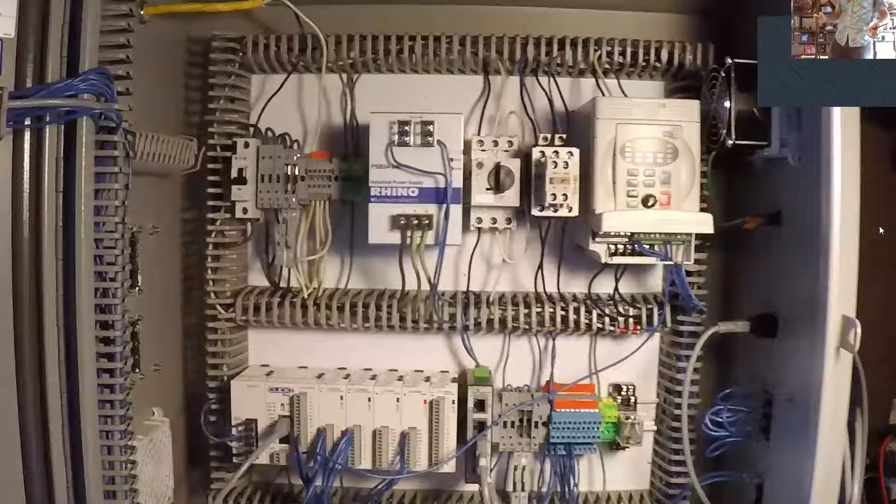Now, what we've been drawing so far is power distribution, and that is this little corner right up in here. So this is our circuit breaker. These are our fuse blocks. These are our terminal blocks. So this is the L1 live power feed on our circuit. It's 120 AC. This is our neutral line on that circuit. Okay. So this is the 120 AC feed in, and then these are our grounding blocks.

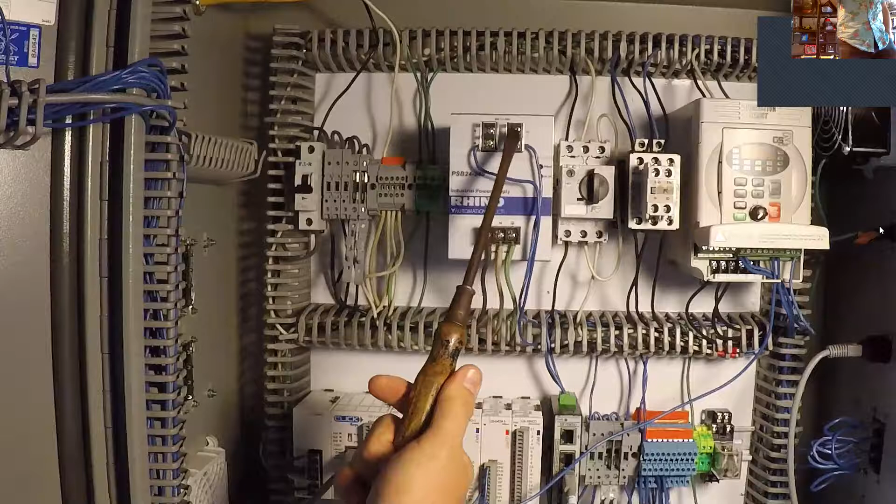Now, one of these fuses, this fuse right here. By the way, this is all de-energized. That's why it's safe to use my demonstrating pointer in this panel. You shouldn't be poking around with a screwdriver in a live panel, but this is all de-energized, so it's fine. This fuse right here feeds this 24 volt power supply right here. So you have your 120 AC coming into these termination points. Sorry, I got my hand in front of the camera there. To these termination points, and then you have 24 volt DC power coming out of these termination points and feeding down to our 24 volt power distribution right here.

And so the 24 volt distribution looks pretty similar, right? You got fuse blocks, you got terminal blocks, and this is powering this controller and this Ethernet switch and a lot of other various components. And then up top here, these modules here are all motor control circuit stuff. So this box here is a variable frequency drive for controlling an AC motor.

And then over here, the last thing I want to show you is my jeans that are hanging up to dry.

Is the back side. These are the buttons. These are the lights and the alarm, and this is the back side of the touchscreen panel. So this is what we've been working on drawing, and we will continue to finalize drawing.

Hey, check that out. You can see both sides of me. Hey guys. It's really disconcerting.

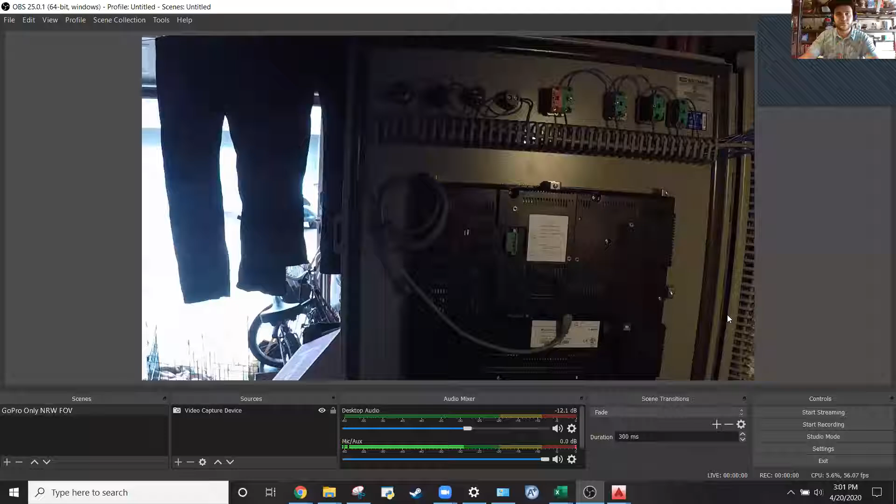So I think what I'm gonna do is in the very near future, I'm gonna make a video where I go through and kind of talk about each component in that panel, explain its purpose, explain the wiring a little bit, and have you guys just watch that on your own time, so that we can get into more of the programming going forward in the near future.

So on Wednesday, we're gonna do a little bit more AutoCAD drawing stuff, and then I'm gonna briefly go into ladder logic. So we'll start poking around in the Click PLC programming software. And then the following Monday, we're gonna have a guest lecture from a guy I work with sometimes named Bill Mueller. He's been doing ladder logic programming for a really long time. So I'm actually gonna get him to introduce programming ladder logic and programming PLC controllers.

So it's gonna be a little bit of a change of pace, but I think he can do a really good job of talking about some different aspects of what you should watch out for when you're first starting out programming PLCs. And then from there, we're gonna shift gears pretty quickly into writing and testing code in that panel that I just showed you. So I'm just giving you a heads up now. We're gonna change pace pretty quickly.